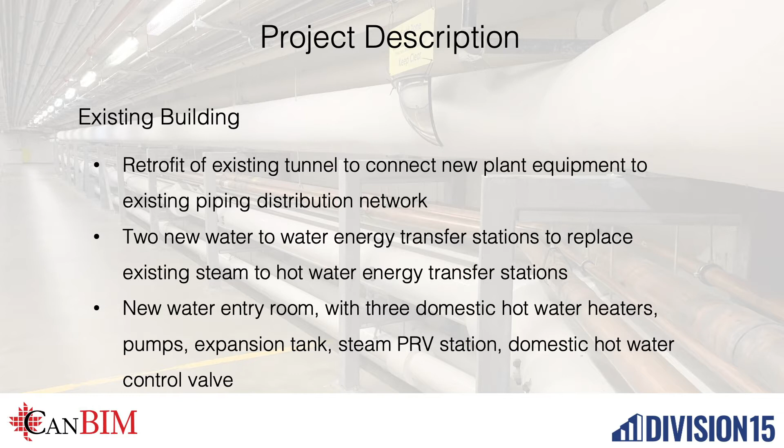So there's 2 new water-to-water energy transfer stations, which transfer the heat from the plant to the different buildings, as well as a new water entry room that was all to be in existing spaces. So these were break rooms or offices that were retrofitted to make space for these new mechanical rooms.

So are there any comments or any questions about the job specifics? Pretty quiet room here.

Okay, I'll go into contractual BIM. I guess everybody in this room knows what BIM is, hopefully. How many of you know what contractual BIM is? Show of hands. Have you dealt with it? Has anyone had any specific challenges with contractual BIM yet, before I get into this? I see some smiles in the room. Yeah, so there definitely are some. So I'll talk a little bit about what it is.

So contractual BIM, basically in the tender phase, there are some stipulated requirements. The owner might say, I want it for facilities management, or I want it to improve the schedule. So what typically happens is they have a project execution plan, they have some requirements, maybe some workflow. So whose role is it to be updating the model? Whose role is it to include changes in the model that are brought on by the owner or the consultant?

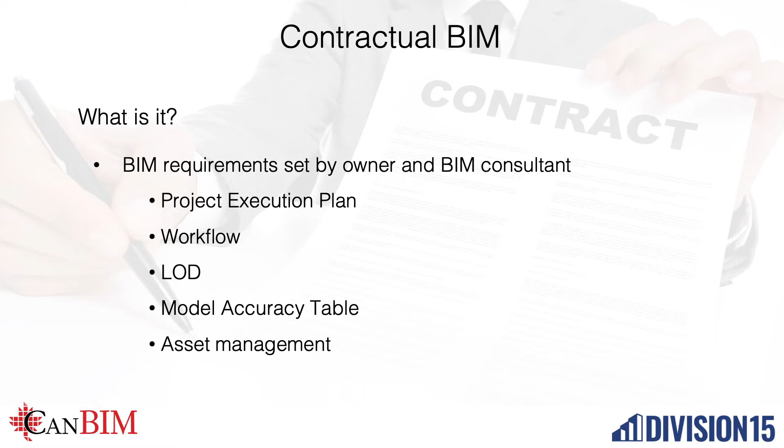What the level of detail of the model needs to be. A lot of times in contractual BIM there's quite a high level of detail that they're asking for. We've also seen a model accuracy table, indicating what the accuracy needs to be on site versus what's in the model. So if you're out by a couple inches, not a big deal. If you're out by a few feet, we might need to go back and update the model. And then, like I said, asset management. For this job, there was the requirement for asset management.

We were still actually working through it, so it is quite a cumbersome topic there. But yeah, it was definitely a learning experience to see the different aspects that were required for this job. I guess one thing to note was

originally in this job, there was the requirement to track geometry changes between the trade model versus the design model. And throughout the job, that requirement changed. It actually became too much work to be tracking every minor change that was happening because the design model wasn't quite to the level of detail that it needed to be in order to facilitate that.

I'll be going into this in a little more detail further on, but that's one of the most, I think, noteworthy points of the contractual BIM that we noticed. So some of the benefits. So definitely a better defined scope, better collaboration, so everyone's kind of forced to work together.

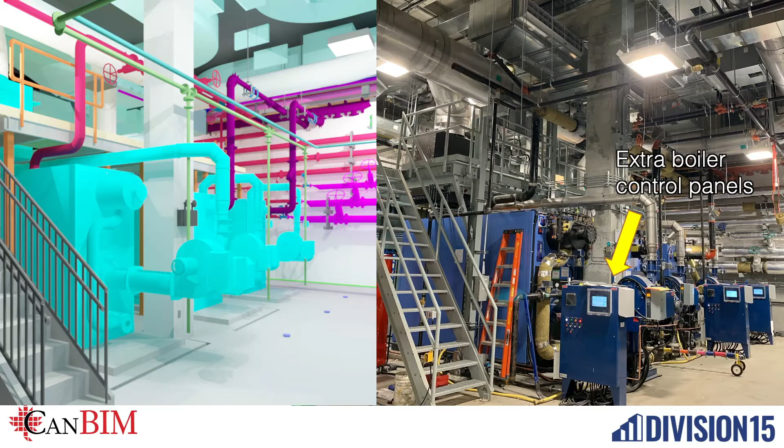Lessons learned. So this is kind of just a little funny example I have here. So even though we requested certified dimensions, asked for installation information, surprise, surprise, what appeared on site was actually some extra control panels for our boilers. So what happened here was even our supplier didn't know about this. It was the manufacturer's. It wasn't shown on any documentation that these were coming.

So what actually ended up happening is we had a meeting with our supplier, with the manufacturers of the boilers, and through the model, we actually found the best location for these control panels. So this is a very, very tight room. We didn't want to block the boiler access. We didn't want to block the burners. There's different requirements in different areas. And because we had a model available, they could actually go before installation and tell us, okay, this is the best spot to put it.

And this is coming from multiple different sources, right? Not just through emails or whatever. We had an actual meeting and found the best place. And I think the model made a big difference in this scenario.

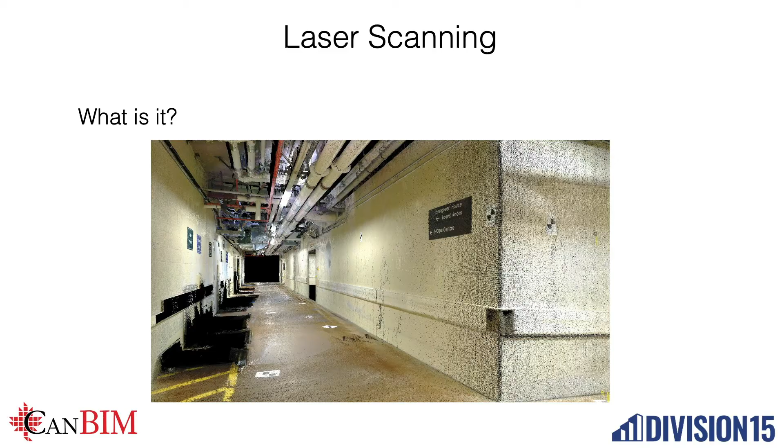So I'm going to start going into laser scanning here. How many of you had experience doing laser scanning or with point clouds? Okay, so a fair number of people. So I probably don't need to explain too much. For those of you who haven't had experience, basically with laser scanning, you take a robotic station out to site. It shoots a bunch of points in different directions, and it makes a 3D image out of those points.

There's the option to include color, where it would actually take a picture and overlay the color information over this point information. So this is just an example of one part of the corridor that we were working on. So this was utilized in the main corridor, the main tunnel, as well as some of the existing rooms where we were putting in the energy transfer stations and the new water entry room.

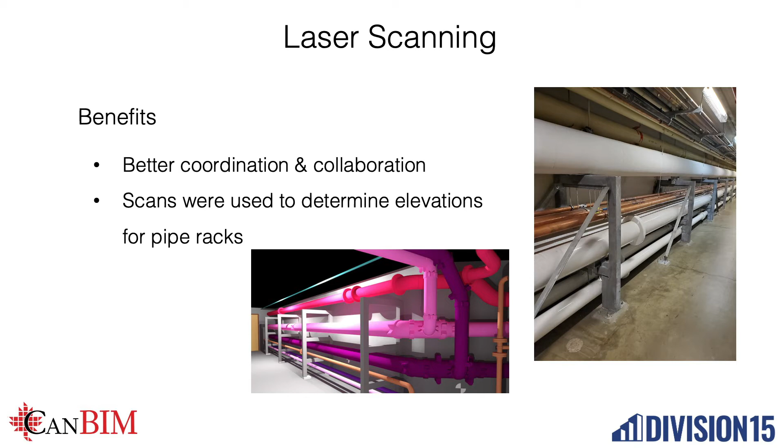So within the tunnel, as many of you know, floors are usually not very level. There was a deviation of, I think, about 2 inches from one side to the other. So 2 inches of grout is a bit much to be including. So we actually had several different configurations of racks to, I guess, accommodate that elevation difference within the tunnel there.

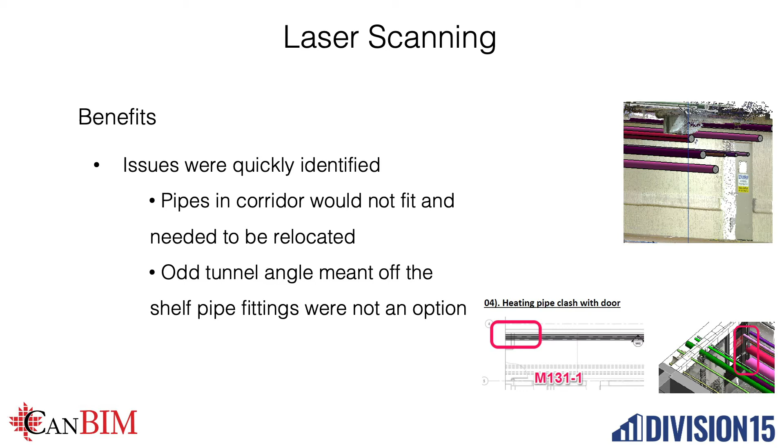The other, I guess, real benefit to scanning that tunnel was there was a bit of an angle within the tunnel, and that angle was not a true angle. It wasn't 30 degrees, it wasn't 45, it was, I think, 35 and a half or something. 33.5? So, in the specs, we were only allowed to use manufactured fittings. So what this meant was our steam pipe, which is welded, how are we going to make that work?

Because we had realized this early on, we actually saved quite a bit of time. We still needed to request that we could have a custom fitting for the spot. But because we had realized so early on, that RFI had time to make it through the system. And I think there was a great benefit to that. Otherwise, we would have been installing this and then found the problem.

Maybe this would be a good time to ask the audience, have you ever seen any major benefits from doing laser scanning? Quite a few of you have used it before. Anything you guys want to share? Yeah? We're doing a hospital project right now with the existing boiler and kind of gutting 80% of the stuff, but 20% has to stay in. So we're basically seeing where our design is conflicting with the existing pipe. Really helpful.

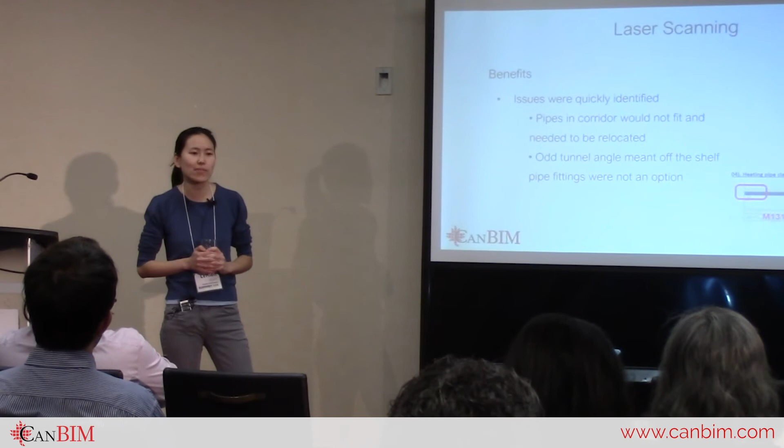So one of the things I want to bring up with laser scanning is we are the contractor, so this was done very late in the game. If there are any owners in the room, I think it would benefit the owner to do this scanning and provide that to the consultants, or have the consultants do it, so when they're doing their design model, it's to something accurate. Because on this job, they did the design from as-built drawings, which I can show you in the next slide.

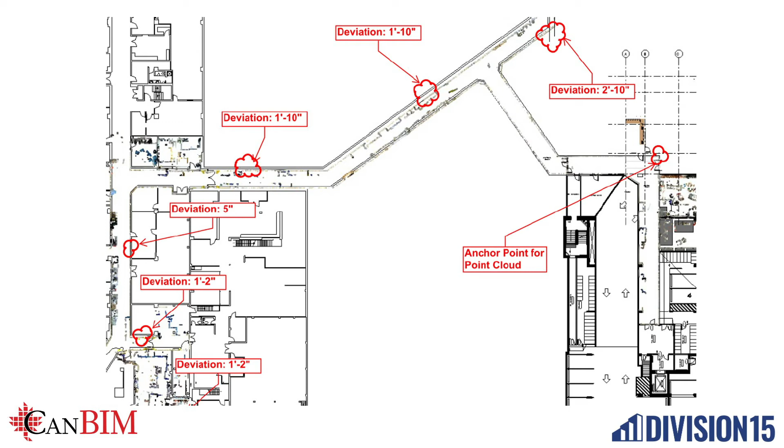These are the deviations we found. At one point, we're almost 3 feet out, so that's quite a big deviation. If we had just followed the architectural as-builts, all of our prefabrication would have had to be redone. So every time, sorry, go ahead.

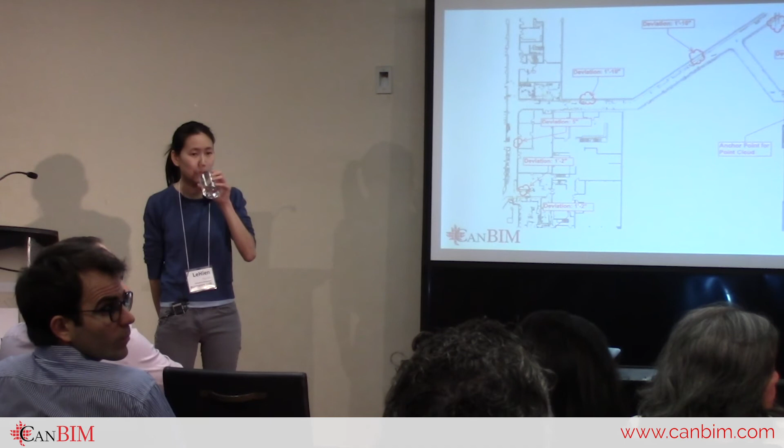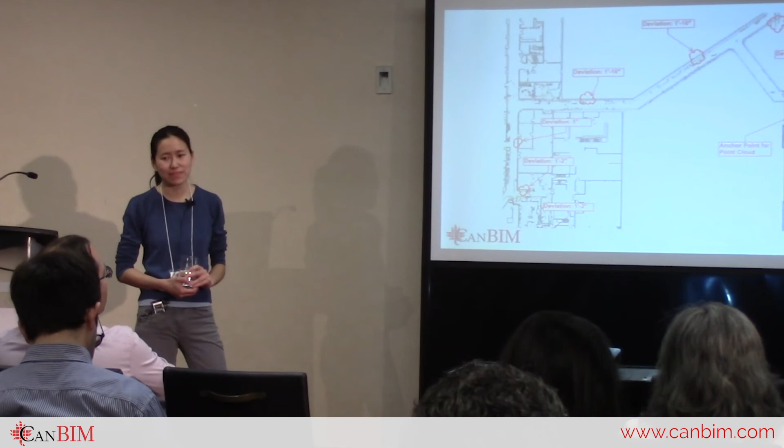Yeah, I would agree with what you're proposing, because our laser scans were used exactly the same way as Division 15, in that the laser scans were the governing information for how to model in that room, because the design models were actually pretty far out in terms of location and existing conditions. So having that scan done beforehand as a back check or an initial guideline for the design would probably eliminate a whole lot of back-end work. Exactly, yeah. Anyone else? Okay.

So one of the challenges we had is linking and registering scans. Because the tunnel was so long, like Harry said, it was very challenging. If you have a square room, it's different. But the tunnel I think was 8 feet wide, is that right? Yeah. And very, very long. So what we ended up doing was splitting it into different sections. As you can see here, we've numbered the different areas and sectioned them off. We modeled up to a certain point, included the new scan, modeled that. That allowed us to have a faster model, as well as make minor adjustments as we go.

Another thing is we did our scan before demolition and construction of new walls. In hindsight, I think it would have been a good idea to go back and scan again after the construction of the new walls. For example, that door I said was relocating, it would have been nice to know exactly where that door is afterwards.

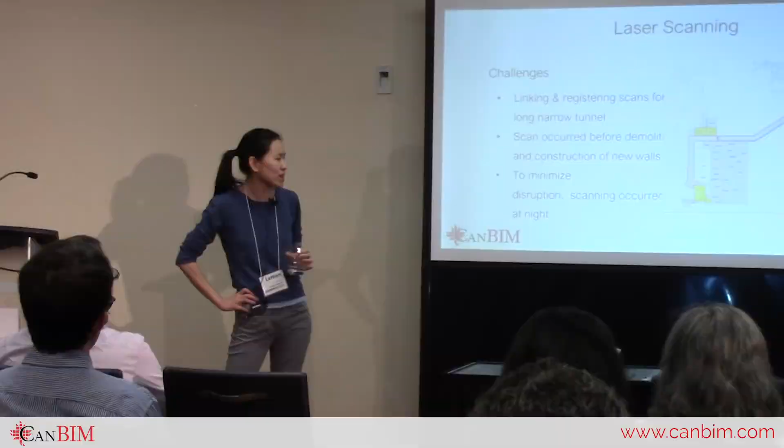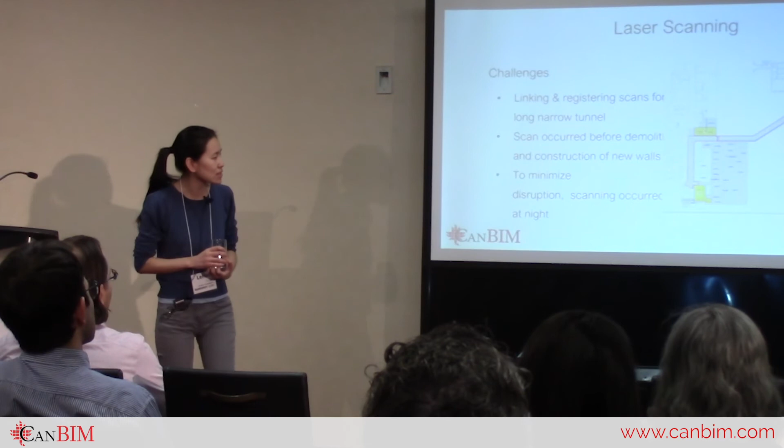Like Harry said, to minimize disruption, we had to scan at night. Because it was a hospital, they had concerns about using a laser there, and it's a corridor used very frequently to transport different objects between buildings. They didn't want that happening at the same time, so it had to happen at night.

And the other thing I mentioned about going back and rescanning: that one corridor where we couldn't run in the ceiling space, we didn't really realize that until we had brought the scan back. We actually ended up having to rescan this whole area, which they're calling the carpentry, in order to reroute our pipe into that area.

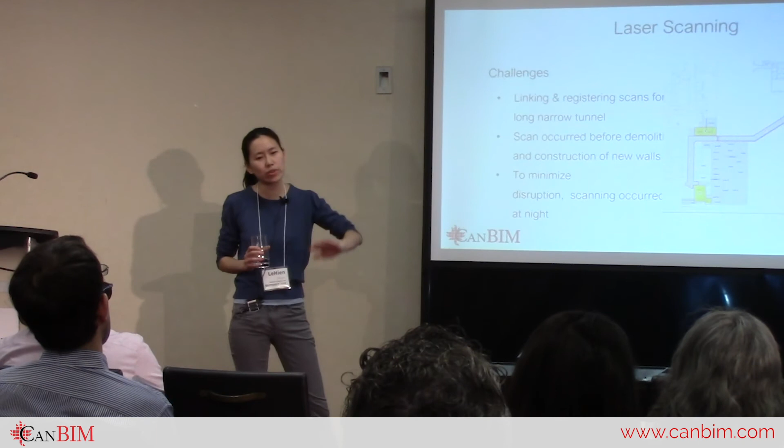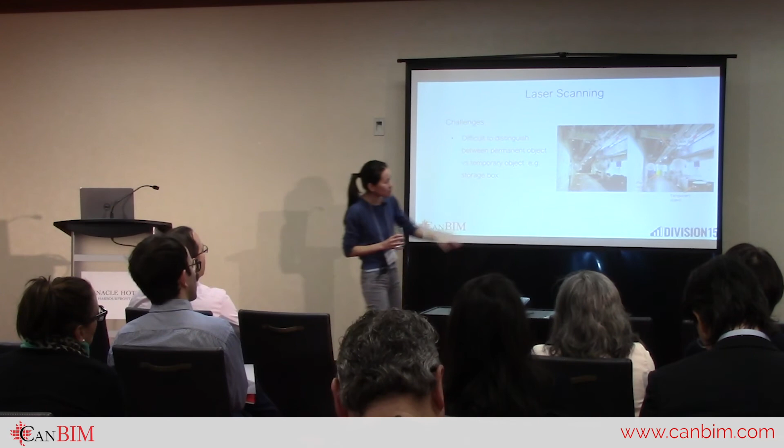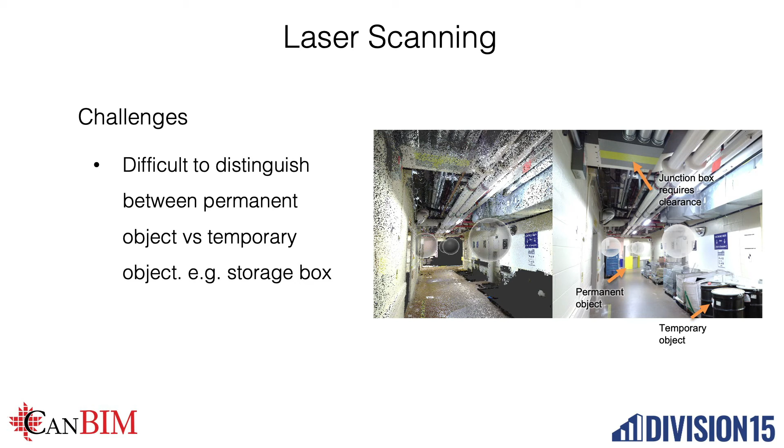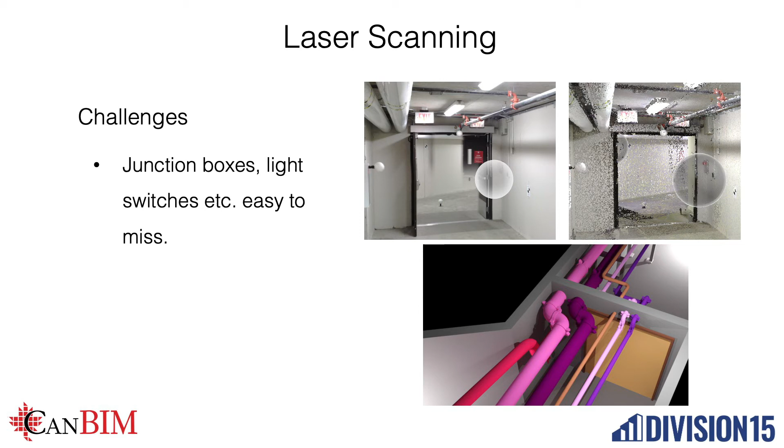The other thing is examples like junction boxes. As you can see here, that's a photo, and that's the scan. It's very hard to tell that that was a junction box there. Other things like light switches, or another example we had is a door actuator. So not all of the doors had actuators, one of them did. So once again, through a site walkthrough, we noticed this and had to reroute some piping.

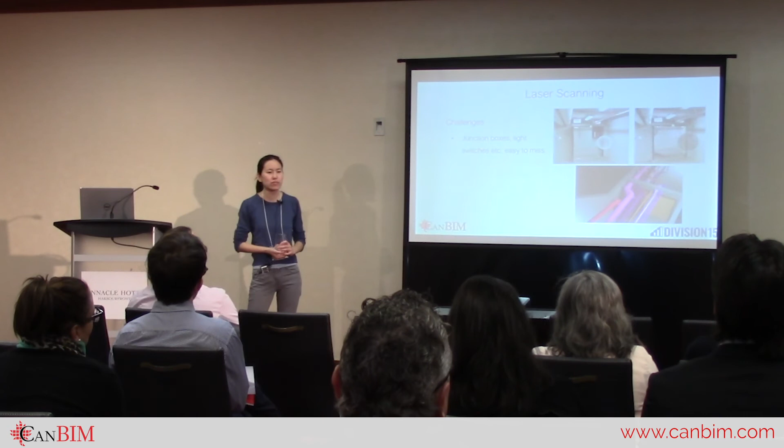So that's one of the big lessons learned, is even though you have a great scan, it's always good to go out to site, have that walkthrough, review it, make sure you have a good understanding of what's there. So does anyone want to share any similar experiences where they've had challenges with distinguishing objects within a point cloud? No?

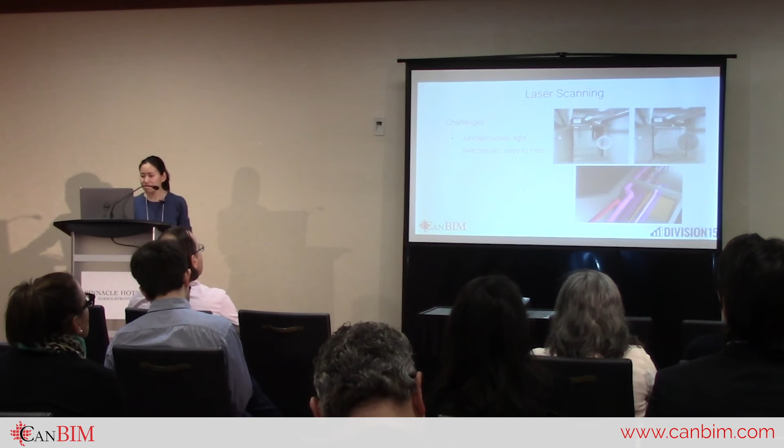So I'll start going into collaboration then. So at the time, we didn't really have an online platform that we were happy with. There were several different options, but they didn't quite provide us with what we specifically needed in terms of review and collaboration. So what we did was Harry made his own. Do you want to speak a little to it?

Yeah, so we started to build our own website initially for VR, AR, and MR application trials. But when we started this project, we realized the key for the success of a BIM project is a shared, viewed model, right? Not just by BIM, but by everyone. So we thought we already have this platform, so we used our platform to design something. I think we have a small video here. Yeah, you just have to go to the next slide. There you go.

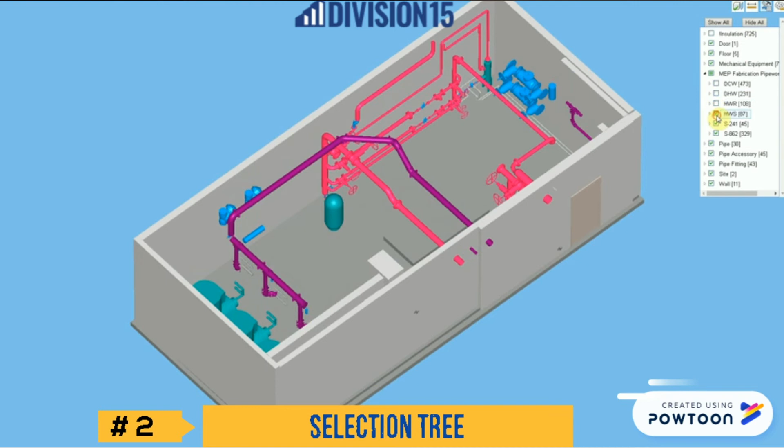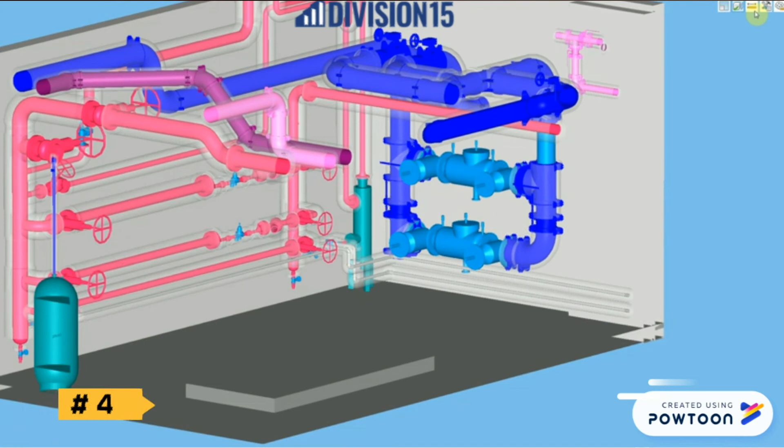So I think this is a big one here, being able to section a point cloud just through your web browser. So you don't need any special software for this? Yeah, I think it was just Chrome. Yeah, as long as you have the internet and a popular web browser, you can just view the model.

So is this something you have tried on a larger scale? Because this project is a little on the smaller side. What do you mean, like, it works on PC as well? No, like a big hospital or a big... Yeah, there is a concern for complicated models. The internet speed is a concern.

And so we end up, for this project, we have to divide. Let's say we have a power plant, we have very complicated pipes in that room. We have to create separate models based on the services. So let's say we have steam system, hydronic system, and vent system in different models. Hopefully, with 5G coming, it might be better.

So I can quickly show the website. So anyone with a cell phone with data can. Oh, I'm not sure. Oh, there it is. Yeah.

So anyone with a smart device, iPhone, iPad, Android phone, you can just open the website. It's LGHPP.beamfolder.com. So here you can see all the models we have for this power plant. You can see we divided all the piping layout based on the systems.

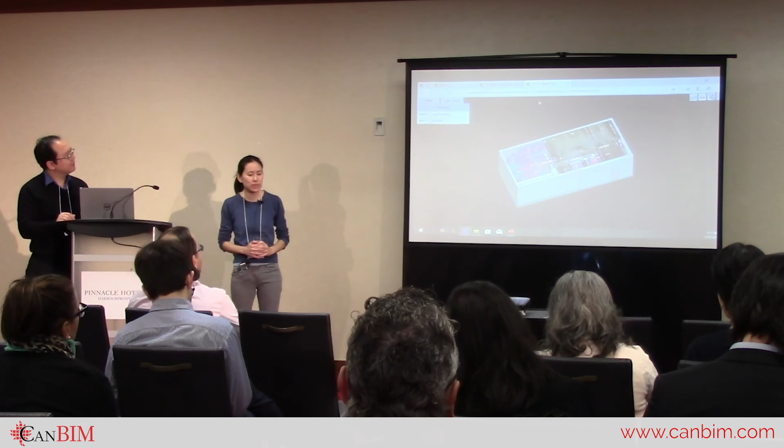So I think the thing I liked best about Harry's website was the model tree, I guess, is the biggest thing I found. So being able to look at specific systems, being able to turn the insulation on and off. With a lot of the model viewers to date, they don't really allow for turning different systems on and off. So it makes it way easier to be reviewing a model.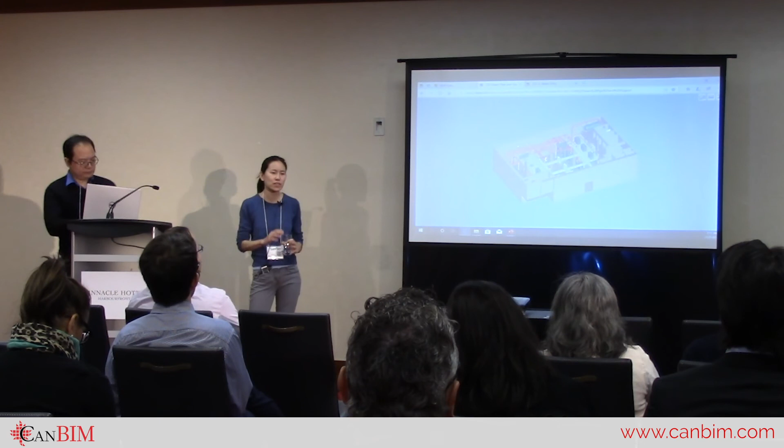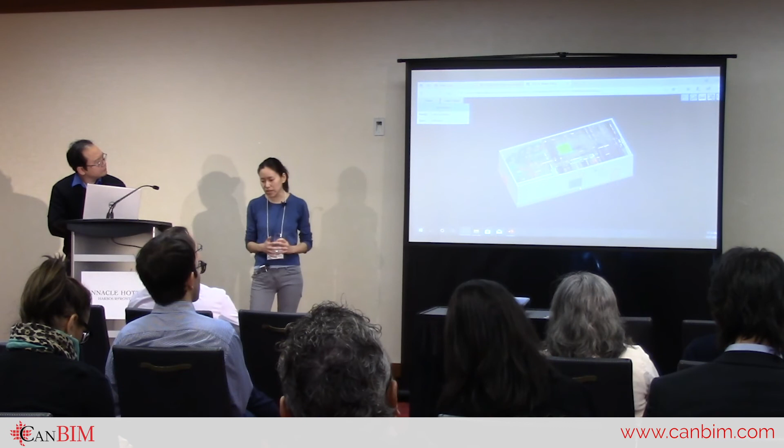So say I only want to be looking at the steam. I don't care about everything else right now. I just want to make sure the steam is modeled correctly, we have the drip legs where they need to be. Then I can turn everything off and quickly review it. And actually, our QA/QC manager was using this web link a lot just to do his work as well.

So you can see you can cut sections with point clouds and/or piping, and you can do dimensions. So the first thing, there's no installation required. Anyone with a smart device can see the model. So that's very helpful, especially for site people. They come to site, they bring their cell phone to see the model, compare with the site condition. They know where the pipe runs, and they can do dimensions on it.

And another feature we like is the PDF linkage. Basically, it's shop drawing linkage. Let's say you have equipment, and there is a link. You can click it, it will open the shop drawing. Because the shop drawings keep updating, we always keep the most current ones on the link. So everyone can see exactly the equipment dimensions and check all the specs.

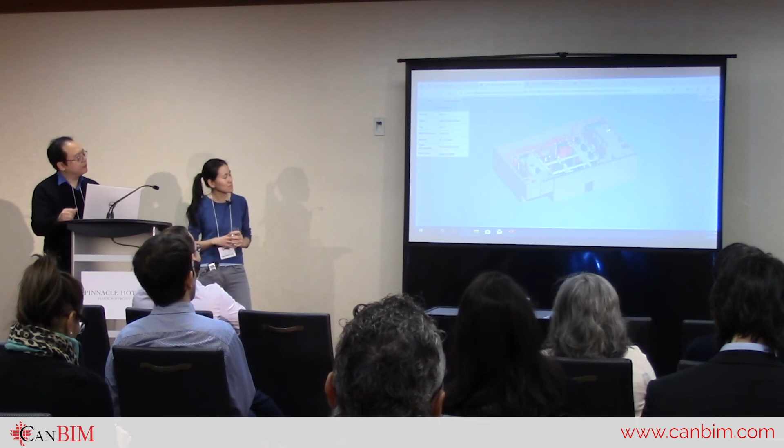And another thing we found very helpful is we have a subcontractor to build the platform for the boilers. And for them, because of the platform, we have so many pipes, sometimes it conflicts with the pipe. And with this one, we can easily share. They send their 3D model, and we import their model into ours and put it on the website, so we can see the model together to identify the issues.

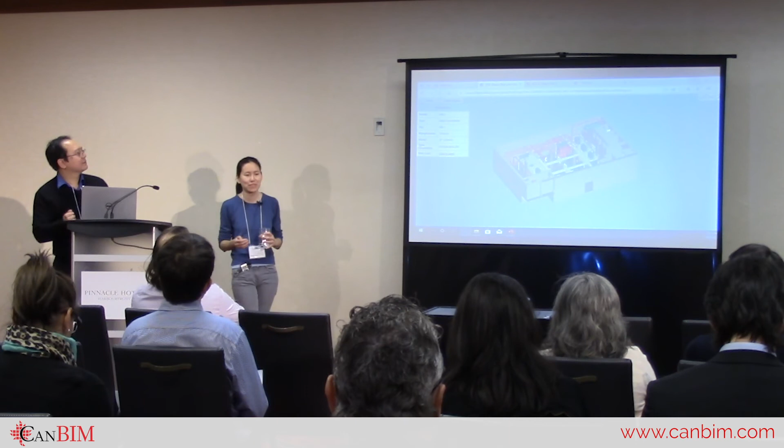And I guess the other thing is with the properties, because Harry built it, he could select which properties he wanted to show, which was a really big benefit, because as many of you probably see with the online viewers to date, either the property you want isn't showing, or it's showing far too many, and you need to go through and try to find the one you're looking for. So it was a much cleaner solution for us for this job.

Yeah, we're glad it finally works. Did it take you long to build that? It's step by step, yeah. We didn't do that full time. We went the wrong way. It does take long. But once you get on the track, it's all right.

So maybe we'll take another little break and ask the audience, are there any online viewers you're using right now that you really like? That's the one that we started using about last year, and I agree, it's a very powerful tool. Because when we started this project, we didn't have Revizto. It seems to do a lot of the similar functionality. Exactly, and this one is just a lightweight viewer, not like Revizto, a coordination tool to create issues. That's more powerful.

But something was missing, though I think it's improved now. Something like cut sections of point clouds, I don't think that tool can do that. It does do that. And also we need to install it, we need to figure out how the license works. Yes. And this one, you can just send it to anyone. You get what you pay for. Well, it's also got the PDF shop drawings, which is really nice. Yeah, it's got a PDF link for equipment.

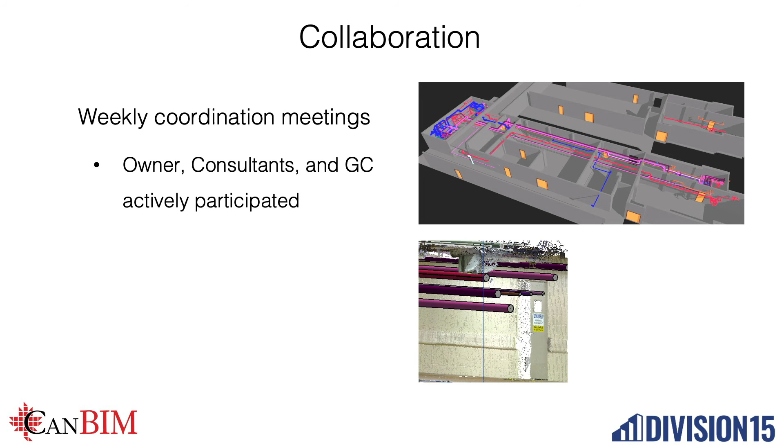So a little bit more about collaboration here. Like I've said before, we had weekly coordination meetings with the owners and consultants and GC. And I think on this job, the success was because of this. To have all that feedback quickly and collaboratively, yeah, there were a few challenges here and there, but overall, I think being able to get that feedback was essential to having this job be a success.

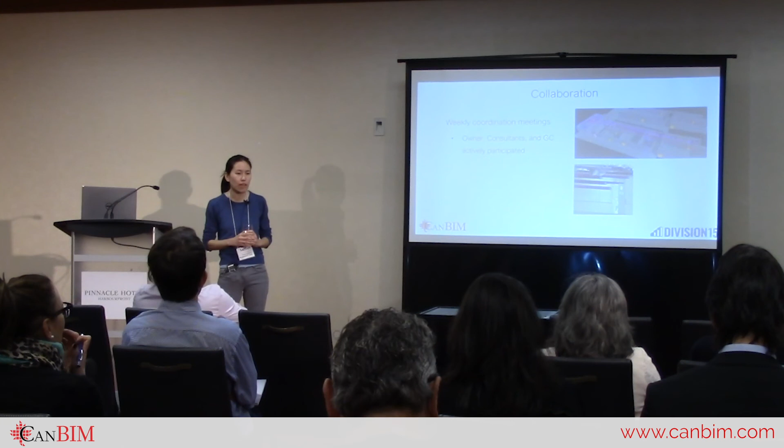Did you find that owners attended regularly? They did, yeah. At least for the first 6 months, roughly. Once the job started to move along, we saw less participation just because a lot of the issues were getting resolved. But in the beginning, when there were quite a lot of issues, everyone was very actively participating.

So the other thing is the complex questions. There were a lot of very complex questions in this job just because of the systems that were involved. And in a lot of our meetings, we did use BIM. We used BIM as a visual aid to explain these questions. And I think it would have been very difficult to explain them without BIM.

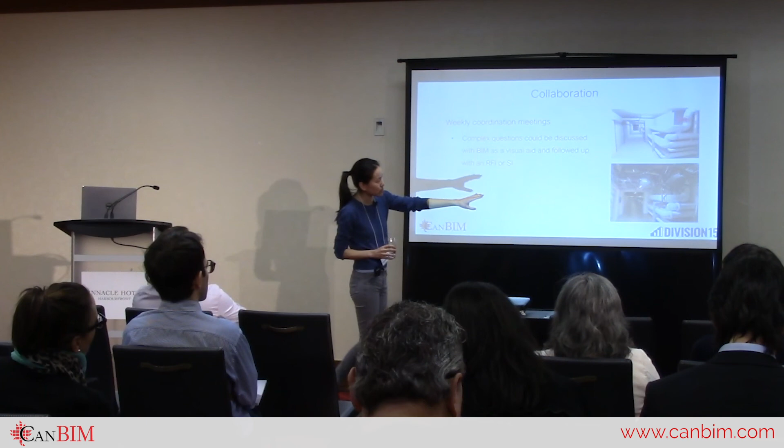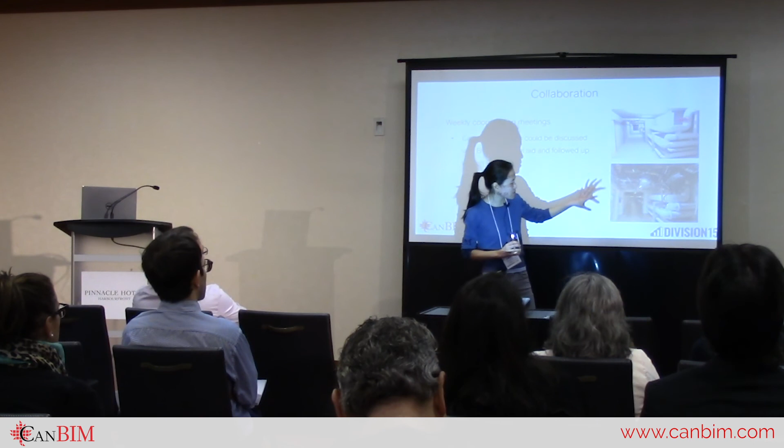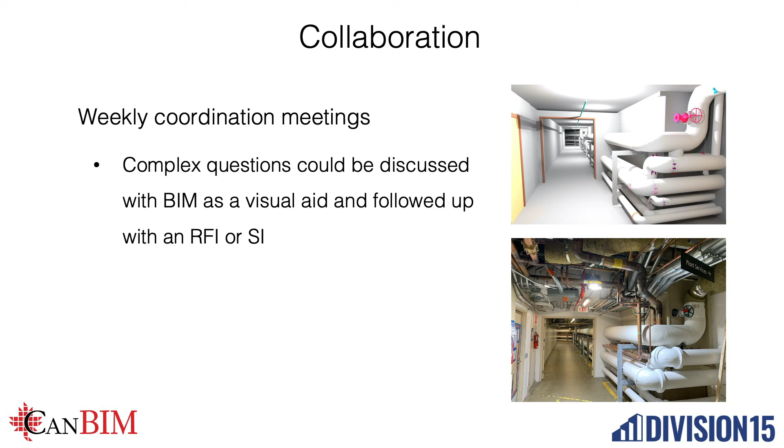Trying to describe what we're doing here. So this is where we had relocated that pipe into the carpentry area, like I had discussed before. There's actually a door on the side here, and basically what we needed to do was pipe all this beside the door, bring it up into the ceiling space, and then across the carpentry area. Without showing this, explaining how we're planning on routing this pipe would have been very challenging, but because we could model it in and show everybody, this is our intention, do you have any feedback? I think it made that process go a lot quicker.

And then with these coordination meetings, a lot of times it's followed up by an RFI, and then the consultants will issue an SI to follow up with that. It seemed like a pretty good way to go about it because we could RFI the question, but otherwise it would have taken the consultant a lot longer to understand what it is we're asking.

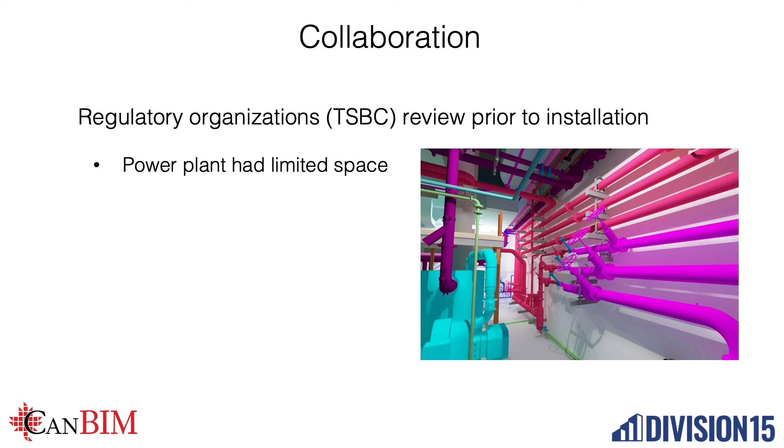So another benefit that we saw was we had a regulatory organization come and review the model with us prior to installation. So this is TSBC. Basically, the power plant had very, very limited space. As you can see here, we ended up having to turn a lot of the valve handles just to make enough clearance to walk through that area between the piping and a boiler. This was actually a pretty common occurrence throughout the whole power plant, where we had to make minor tweaks to get enough space to meet requirements.

But TSBC was available to provide suggestions to us, clarify what the codes really meant, and provide knowledge of areas that we need to rework. Some of the things that were commented back were examples like equipment servicing.

With our platforms that we had to design, I'm not sure if I have a photo, but basically you get up top of that platform and there's the, sorry, Harry, help me out, what is it that's running above it? Yeah, the economizer is up there, as well as all of the ductwork. Yeah, the breeching duct above. So there was very little headroom. Additionally, some of our pipes needed to run over top of the platforms. So it wasn't the best access, for sure.

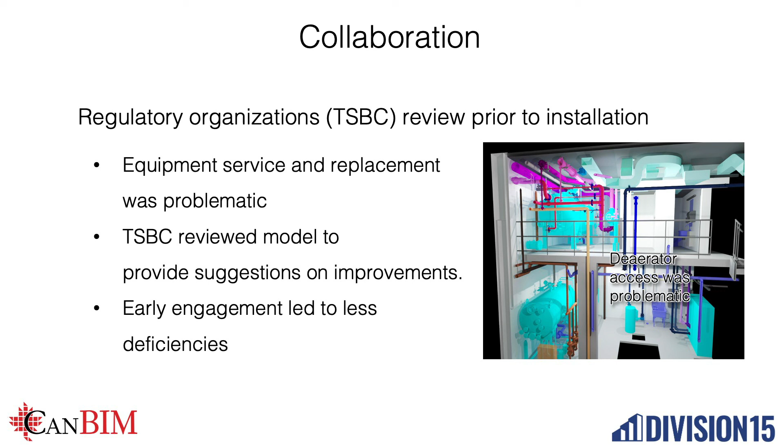So here I have an image of an example. That's a deaerator up there on the mezzanine level and the steam heat exchanger right beside it. As you can see, it's very congested in there. And this is only with the larger size piping. We didn't even include any of the smaller sizes. So that's kind of the example of the space requirements we were working with.

Another example we had was our PRV station, so that's right here. And because it is a steam system, we had to look at the stress analysis for this. So actually we looked at several different configurations to try to fit this on that wall. Originally, I think some of the valves were actually over here closer to the deaerator at a pretty inaccessible location. So we ended up trying to find the best solution with putting all these valves along that wall.

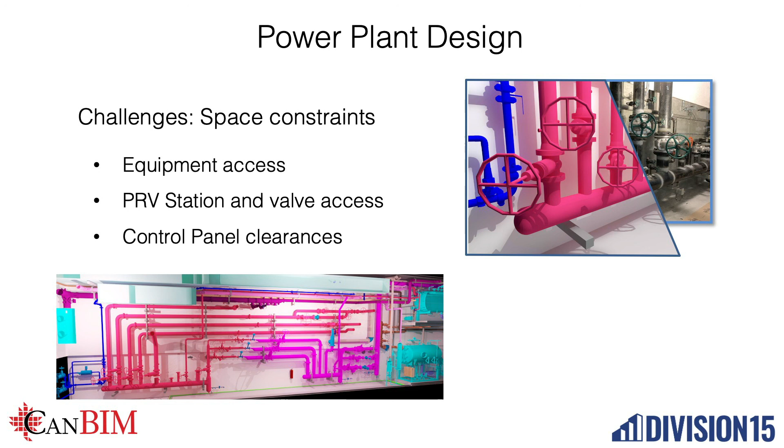We had a steam engineer or a stress analysis engineer work with us to suggest different options. And this is kind of what we came up with, and I think it looks pretty good. Another example of us needing to rotate valves in order to keep our clearance requirements for access.

Another challenge we had was some control panels. They were modeled in. Unfortunately, the mounting of them wasn't modeled in. So they required an extra 2-3 inches, which we didn't quite have space for. So we actually ended up having to move some equipment and change our housekeeping pads. Those are some examples of the challenges we had there.

Some other challenges we had. Because it was a steam system, we worked with them in the past, but it was quite a complex steam system in this job. And we definitely had a learning experience in terms of understanding steam trapping, dealing with condensate, different pieces of equipment that went along with steam systems, lots of reading of manuals and installation manuals, and just generally understanding that system, I think, was a challenge for us.

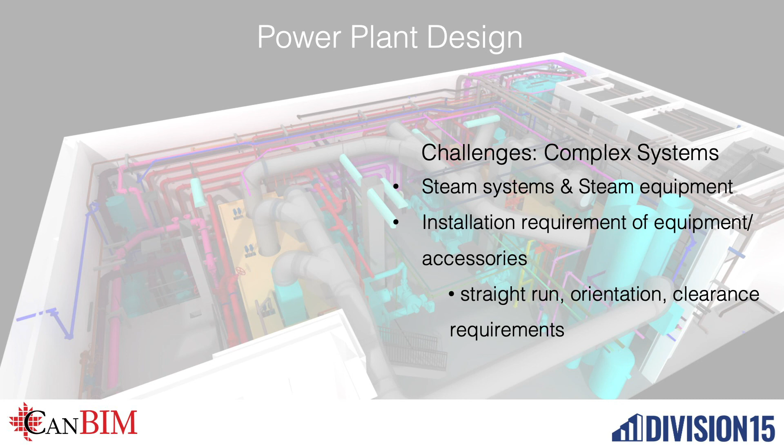And then, once again, like I said, not all of the equipment showed up as expected. Sometimes with slightly different dimensions, sometimes, like I said, with the extra control panels. And because it was so complex, there were quite a lot of valves and accessories for which we needed to accommodate straight run requirements, orientation, clearances. So there was a lot of time spent in this one room just trying to make sure that we've captured all of these components.

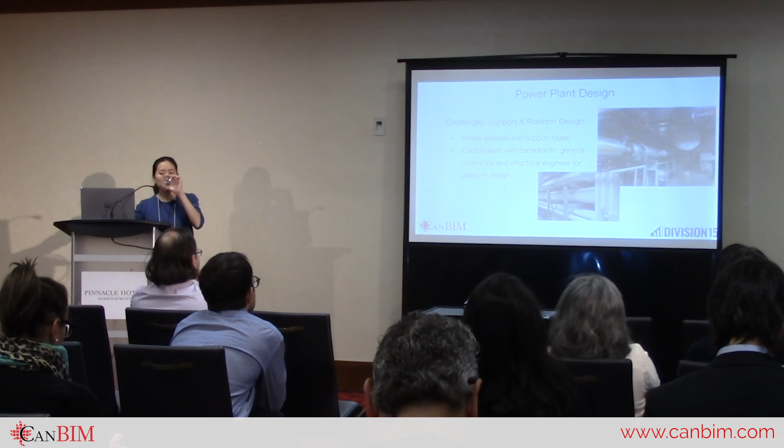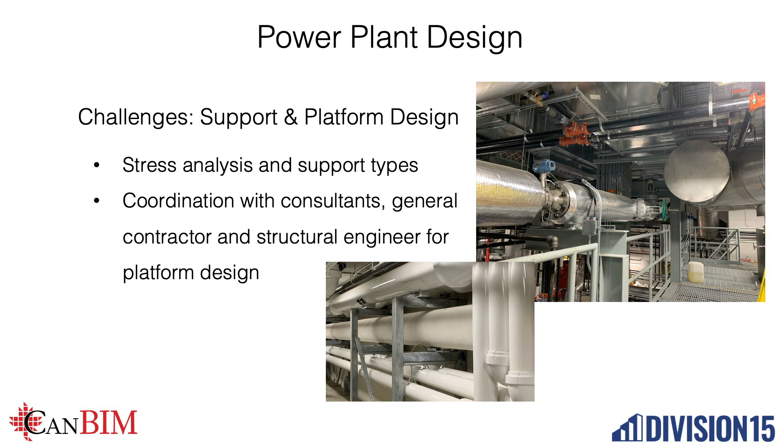So talking a little bit about our support and platform design, like I had said previously, with steam systems, we had done a stress analysis job, and there's quite a lot of specifics on anchoring points. So just a few images here. Our racks, you can see we have some specific steam anchors there. As well, we ended up supporting some of our pipe from the boiler platforms, and that had to be engineered to ensure that the platforms could handle the weight of those pipes.

So a lot of coordination with the consultants, our own stress analysis engineer, and a lot of coordination with the general contractor in terms of where these supports could go. I believe some of the walls we couldn't support off of, so just the supports alone involved a lot of coordination.

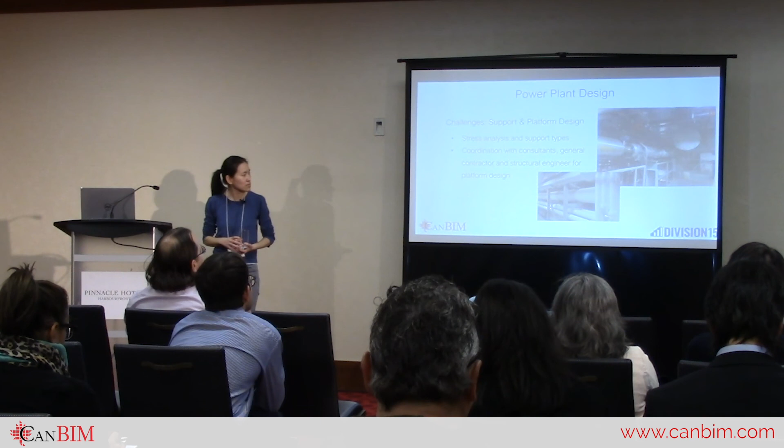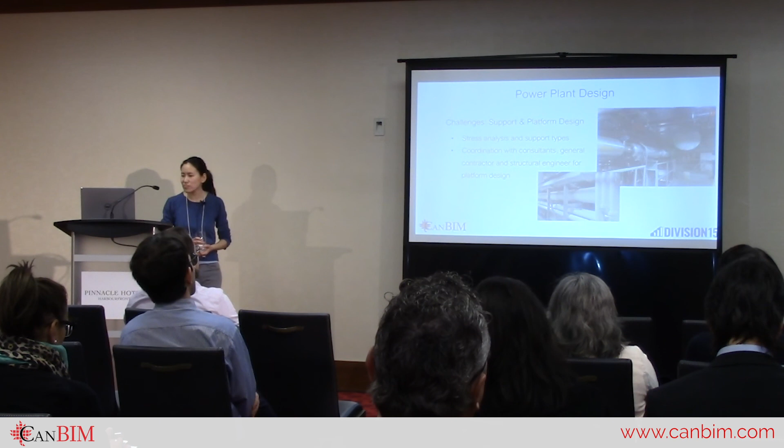One of the notes I wanted to bring up was part of the contractual requirements, going back to this, requesting that we had to track all the deviations. Because of the steam design, that's basically impossible. Because there are specific anchor locations that need to be followed, that steam design needed to be modified. So there were so many modifications. If we had needed to track every single change, that wouldn't have been practical.

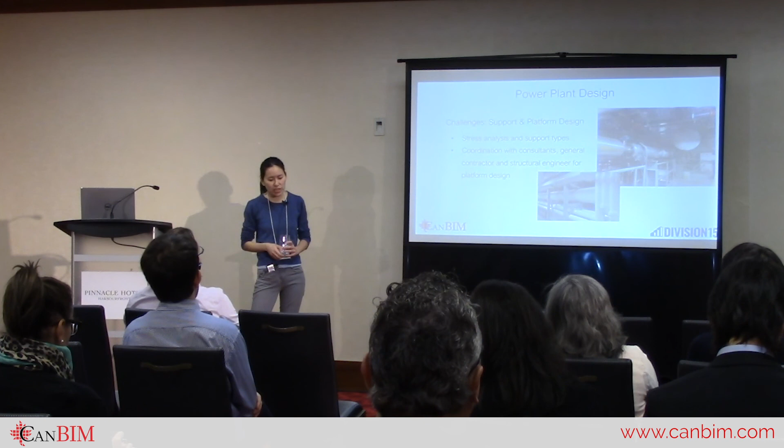So lessons learned from this: the contract needs to be flexible, I think, to take into account potential changes that could happen during construction. And then also the understanding of what BIM means and how we can work as a team to facilitate this and reap the true benefits that BIM can provide.